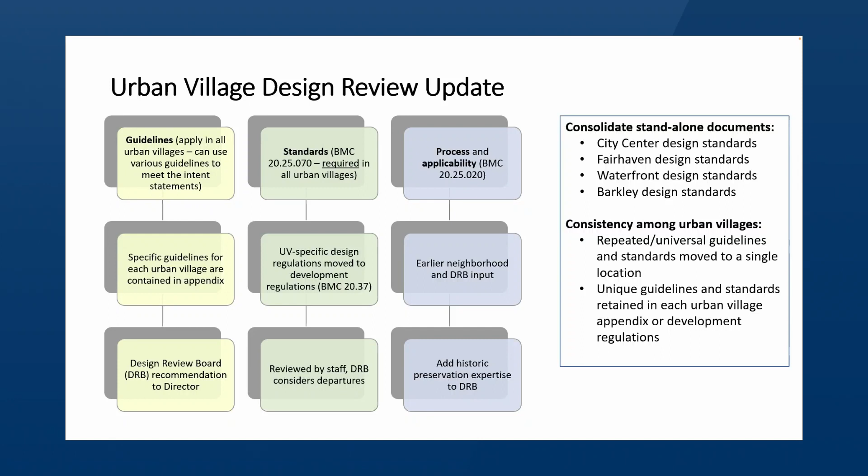The process and what's applicable - that has really been, in some ways, the meat of the project. We aren't really proposing any substantial changes, but a couple minor changes, changes to the application material, and moving the review process back to the beginning of the design process, which we think is going to be really helpful for creating predictability. So we'll get into that in just a few minutes.

So I think now I'll hand it over to you, Grace, to talk a little bit about the steering committee and the timeline, and then diving into the guidelines a bit. Sure, thank you. Thank you for having me.

So the timeline - we started this project in 2020, actually just before the pandemic. Our initial meetings, interviews, and tours happened in person, but we worked with a steering committee comprised of architects, developers, and contractors working in the city of Bellingham on larger scale development. We had three meetings with them, one in person and two online.

The other activities we did in 2020 were reviewing all of the existing village documents. As Darby mentioned, there were a number of different versions here and there, so we looked at them all to see what aligned and what didn't. Really our task was to see if we could combine where we could, edit out, and then streamline the document into one.

We also had discussions with Public Works and with our design review staff and folks that had been using the design review process, to learn what was working and what wasn't. So with that, we then drafted the guidelines.

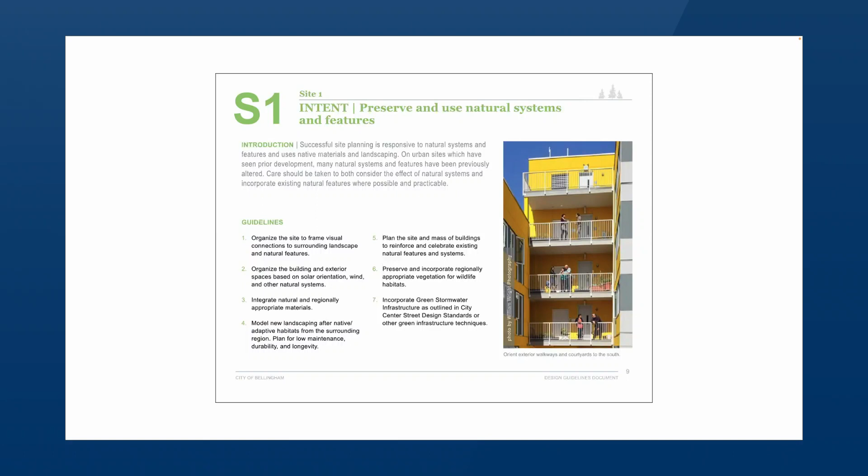We'll walk you through one of the intents to show how this is meant to be used. I think the next slide has the breakdown, Darby.

The category is noted in the upper left with a big graphic, like S1 or S2. The intent is a very quick synopsis of what the guideline's intention is, followed by an introduction right below it that further helps to explain or expand upon the intent.

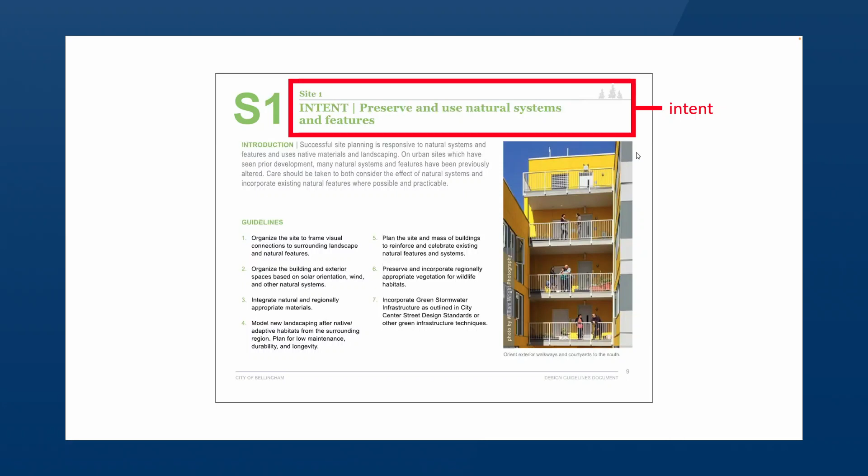The next slide has the guidelines—each section has anywhere from four or five to seven guidelines. It's not intended that every guideline must be addressed; these are examples of how an applicant could satisfy the intent. It's also possible for an applicant to come up with their own site-specific approach, as long as it satisfies the intent outlined above.

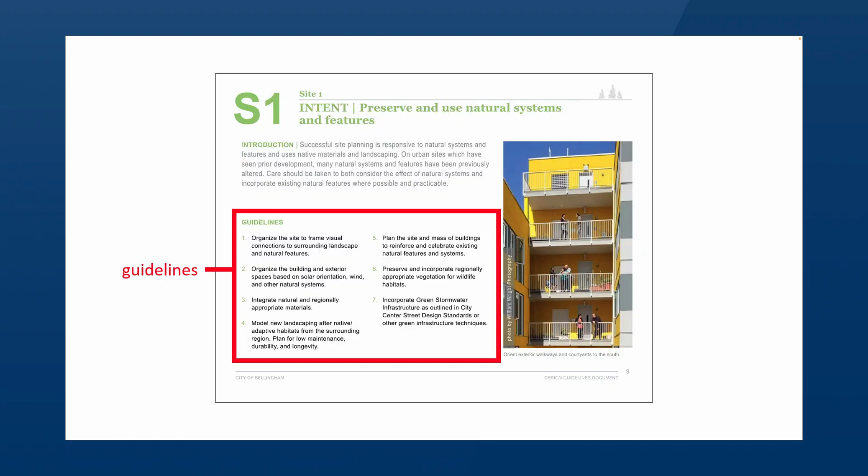There's always a second page that provides visual examples of what the intended outcome might look like—a series of images following each of the intents. I think that's the synopsis.

Are you going to talk about this, or is that—okay, sure, I'll just touch on this quickly. Thank you for that overview, Grace. I hope that as you were flipping through your packet, you saw something that was clear, easy to read, and easy to use—that's what we're going for.

This is an example of a page from the individual urban village appendix. At the back of the document, Appendix A has a section for each of our seven urban villages describing its character. We identified gateways, pedestrian intersections, and key intersections on a map, creating a reference point for special considerations the design review board or applicant might want to take into account. We also pulled out things specific to those urban villages, so hopefully that's pretty intuitive as you work through the document.

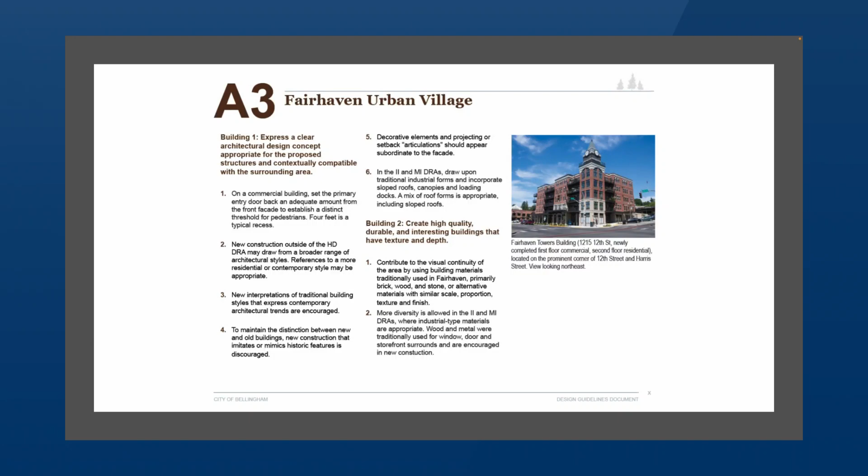Now I'm going to turn it over to Katie to talk—sorry, Emmy, I just spent quite a bit of time with her cousin. So Emmy is going to talk with us a little bit about the process for developing the historic commercial, or historic, guidelines. Thanks, Emmy.

Thank you, Darby. Basically what we did is combine what was the historic guidelines for Fairhaven and City Center and made it applicable for all of the urban villages. These are guidelines, not standards, intended for buildings found to be historically significant or eligible for listing—meaning 50 years or older federally, or 45 years or older for the state of Washington, and found eligible. These are general practices for historic commercial buildings within the urban villages, and any applicant can reach out to staff or the state to find out if a building is eligible or historic.

Because not all urban villages had these guidelines, we wanted to combine and make them eligible for all urban villages. I think this is included in your packet, so if anyone has any questions on that, I'm happy to answer. But this is just guidelines for those existing buildings and any additions to those historic buildings.

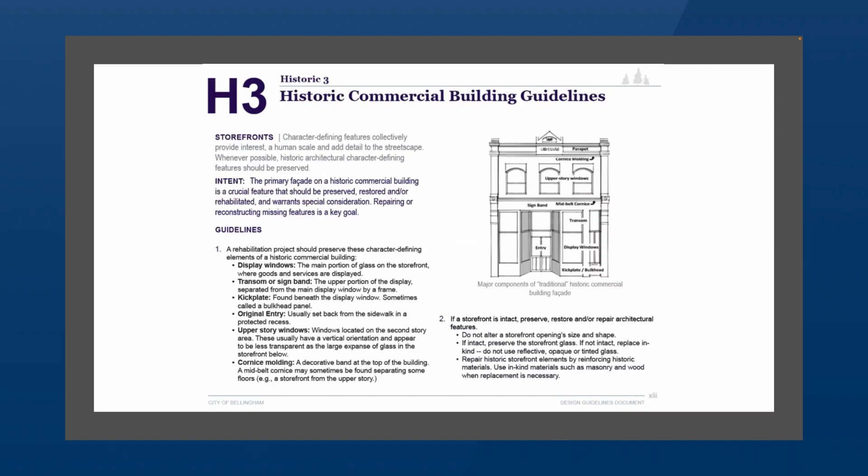Thank you both. So that's the end of our overview of the guidelines. I do have, not necessarily to get into discussion today, but some questions we want you to be thinking about as you're looking at the packet over the next couple of weeks: whether we've covered the elements that are really important for good design, whether it's clear, and whether it's easy to use. These are things we'd love to get your feedback on as we move into the work session.

I think, why don't we keep moving through? We only have a few more slides of the presentation, and then we can hold questions and topic areas for when we get through to the end.

Okay, so next the second category is the Urban Village Design Standards. Again, these are standards that live in the Bellingham Municipal Code. One of the pieces of the exercise that has been really detailed, and part of the reason why your packet is so huge, is that we really wanted to relocate all the regulations into the development regulations section of each urban village code.

Right now they lived in different places—sometimes they were mixed into the sub area plans, which is supposed to be more of a policy document. So what we've done is try to take all those unique standards and either unify them so they apply to all urban villages, which would be in the main body of the design standards, 20.25, or if they're unique and should be kept separately, put those in each individual urban village plan in Bellingham Municipal Code 20.37.

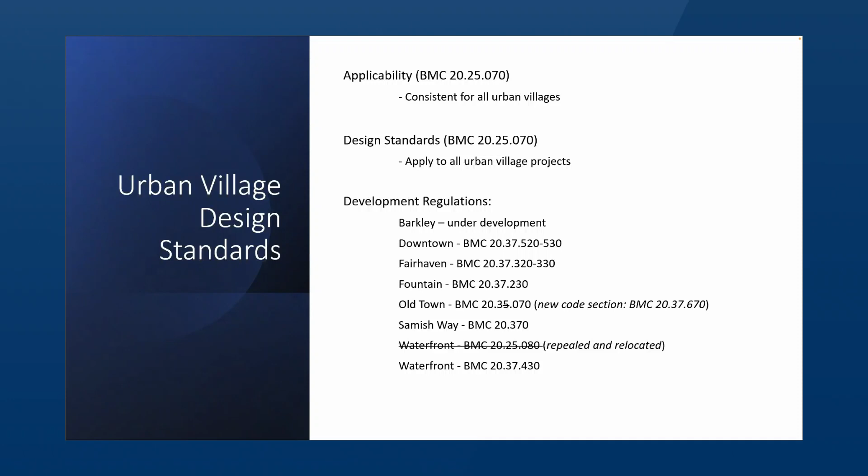As I mentioned earlier, we tried to get really clear about what the priorities are. So you'll notice there are two sections in the design standards: the first is related to site design, similar to the guidelines, and the second is related to building design. These are really specific about how the code says it needs to be done.

Parking lots need to be to the rear of the building. Refuse enclosures need to be screened. Blank walls—here's the definition, here's how they need to be treated.

There is an opportunity within those standards for an applicant to request a departure, and there's specific criteria in there. If there's some sort of hardship why it can't be met, and they can demonstrate that the intent of that standard can be met in a different way, then that can be presented to the design review board and approved by the director. But broadly, they are supposed to be a pretty simple checklist of things to be met.

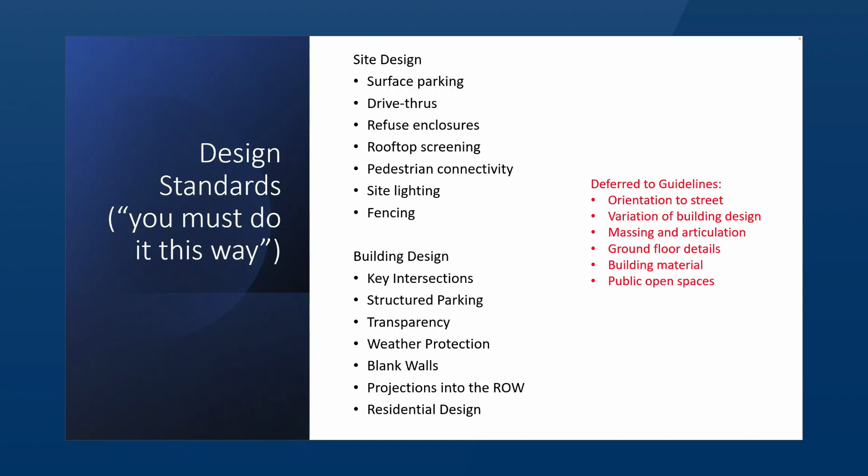And we feel like having those intent statements that are clear, and some different ways to achieve those problems, are going to result in a better design, more creativity, and more clarity than being really specific about how all those things need to happen. The feedback we received in the workshops is really wanting to avoid some of that cookie cutter design where, once we know something works, we just build that building over and over. We'd really like to open it up to allow more creativity through the design review process.

So here's just some thoughts as you continue your review: is it clear, and are the urban village standards that apply to all projects making sense? If there's any that are too narrow or too specific, that we should lift up into the guideline level, or if any just don't make sense, that would be really great feedback for us.

Okay, finally, last couple of slides here. We want to talk a little bit about the design review process. The blue circles here describe the big milestones in the process as it exists today.

There's a pre-application conference, and it varies right now as far as what level or phase in the design process applicants are in. Sometimes people come in when they're just doing feasibility on a property and want to gather information. Other times applicants come in at 50% design, ready to roll, and just want to get the details done. So that's been a little bit challenging — even though the conferences are beneficial, sometimes the design is pretty far along by that point.

Then today, the design review board does their review. It's often very narrowly focused on any areas that staff didn't agree on. So the design review board sometimes doesn't get the opportunity to really look at the big picture and the context of the site and how the elements interrelate.

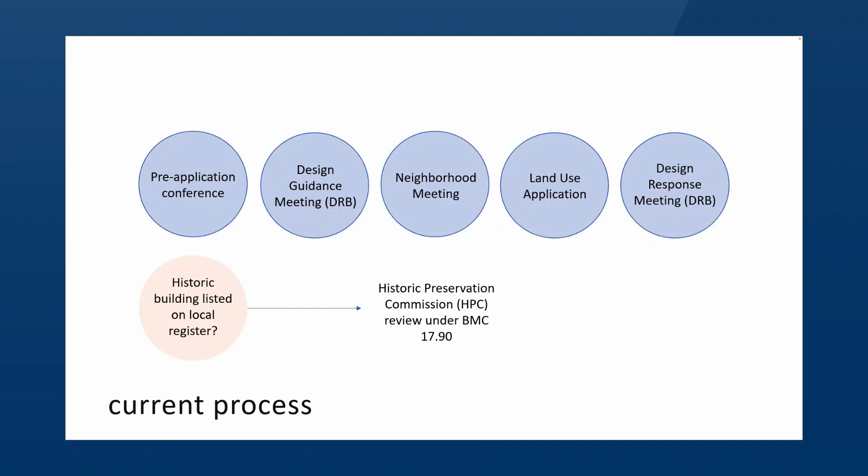And then after the neighborhood meeting, the applicant moves on to the design review application or any other land use applications, and then to the design response meeting. Buildings listed on our local register have an entirely different process under Bellingham Municipal Code, and we're not touching that — just a little note at the bottom there.

So you'll see in the proposed process changes that we want to be really clear about this pre-application step. We've been toying with what to call it, but we've landed on 'pre-design conference.' We really want that to be something more than just an over-the-counter conversation or a call to the permit center — 'hey, tell me what the zoning is, tell me what I can do on the property' — but a little bit less than our technical pre-app meetings.

It's an opportunity for the applicant or the architect to come in and meet with the planners. We can pull in Public Works or Fire and really talk together about what the priorities are — if there's any yellow flags or site constraints, characteristics about the street or other elements, site considerations, or architectural context that should be considered.

Then we're proposing to move the neighborhood meeting to the next step, to really coach the applicant and/or the architect to present to the neighborhood what some of the concepts are. What are the design inspirations? What's the material board? We've talked about showing your Pinterest board to the neighborhood and saying, here's the general mass and bulk, here's what we're thinking about building.

What can you tell us about this property? What can you tell us about this neighborhood? Or here's a couple different alternatives we're exploring — do you have a preference? Really using it as an opportunity to get some meaningful feedback and to introduce the project in its early stage, like maybe at 20% design.